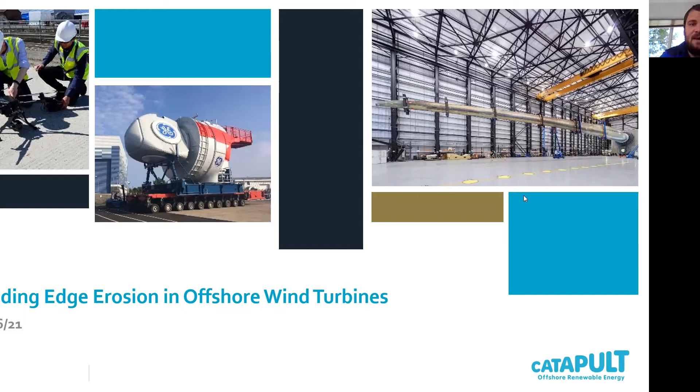It looks like the participant numbers are sort of leveling out a little bit. So, thanks, Vicky. Yeah.

So I think we're gonna start with an introduction from Dr. Steve Wyatt, our Research and Disruptive Innovation Director at the Offshore Renewable Energy Catapult. Thanks, everyone.

Good afternoon, everyone, and welcome to our workshop on leading edge erosion that we're holding jointly with the Royce Institute. I wanted to take a few moments to welcome you personally to this workshop. Thank you for giving up your time. But also, I want to set the scene a little bit, to talk a bit about the catapult and how we work, and also just set the scene for the workshop.

So the Offshore Renewable Energy Catapult has been around for around 8 years now. We're here to help the acceleration and growth of great UK technology into the offshore renewable space. We have the right expertise and world-class assets that are designed to help companies de-risk their technology and move it closer to market. We measure our success on 2 key drivers: our impact in terms of reducing the cost of offshore renewable energy, and also how we are creating UK economic growth in this sector that is growing tremendously at the moment.

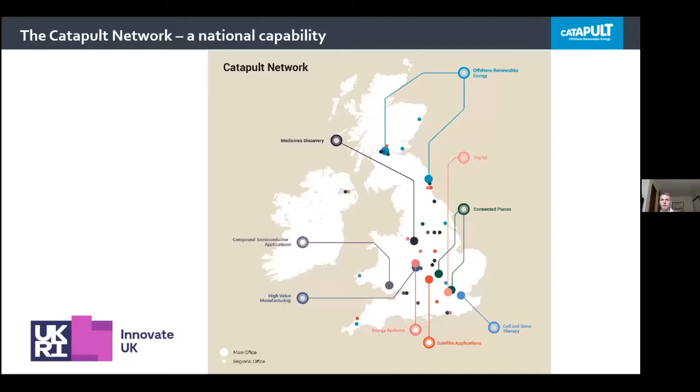And increasingly, we find ourselves worrying about the variability of offshore wind. So as we have more and more offshore wind deployed, we need to think about what we do when the wind doesn't blow. So increasingly, we're working in the area of energy storage technologies, often with the Energy Systems Catapult.

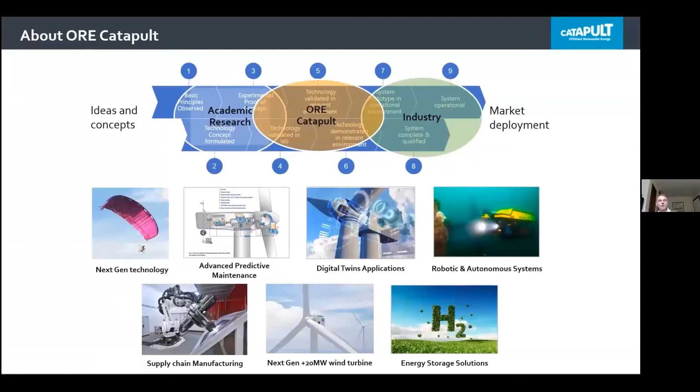And of course, we don't do this alone. We like to think we fill the gap between academia and industry. So we do a lot of the translation from academia into industry. And also we help industry by understanding their challenges and try and source specific solutions.

We have a number of key partners in academia. We've set up a network of research hubs in our key technology areas of rotor, powertrain, and electrical infrastructure, where we partner with the University of Bristol, the Universities of Sheffield and Warwick, and the universities of Strathclyde and Manchester. And these allow us to have really deep technical expertise that we wouldn't necessarily carry on our own payroll. We have the expertise there when we need to engage with it. That's not to say we don't work with other universities, but we find it useful to have these deep, enduring relationships.

I wanted to say a little bit about the market as well. I'm sure many of you are aware of the great success story that offshore wind has been.

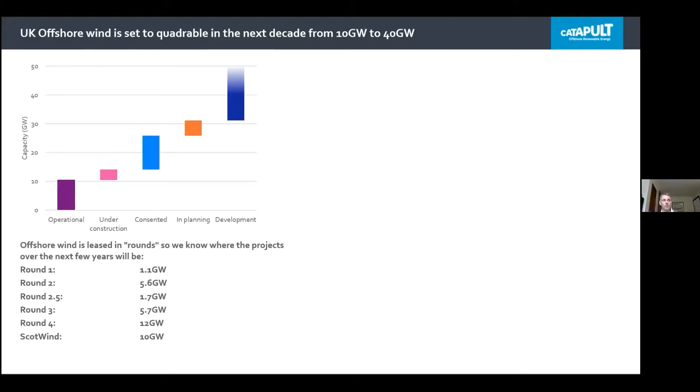We now find that we need longer transmission right out into the North Sea. Of course, that presents problems for maintenance. Of course, we do need even more reliable turbines to make it economic for them to operate that far offshore.

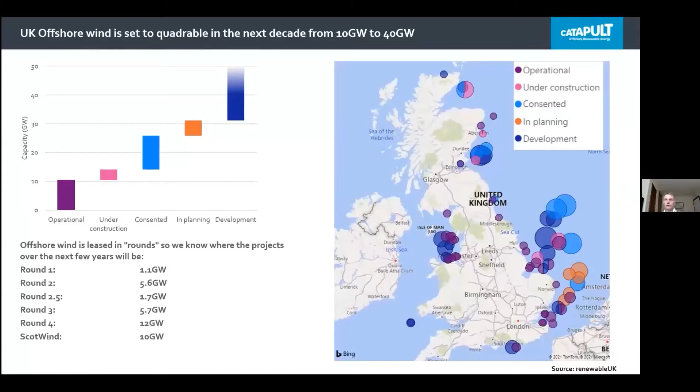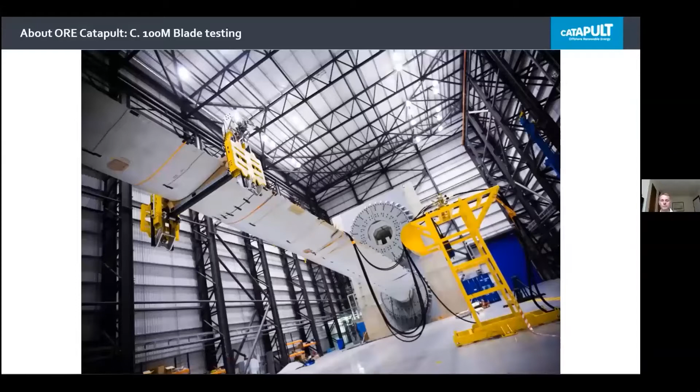We're already finding that people are coming to us with inquiries for blades that are longer than 100 meters, and indeed we're having to chop the tips off blades in order to get them into our facility. It shows you the rate of progress our industry is experiencing.

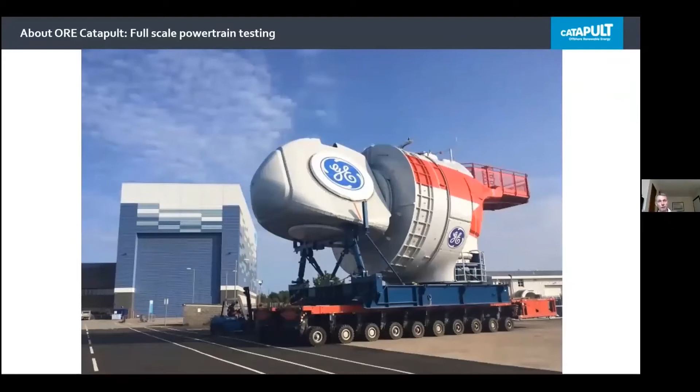And we're also very proud of our demonstration turbine that we have off the coast of Fife in Scotland. It's a 7 megawatt turbine that allows us to demonstrate and test technologies that we wouldn't ordinarily be able to get onto a commercial wind farm. But our turbine is of sufficient scale that it's truly representative of what is happening out there in the industry today. So, for example, we're able to trial different solutions for leading edge erosion and different aerodynamic add-ons onto our blades and evaluate that technology in a very representative environment.

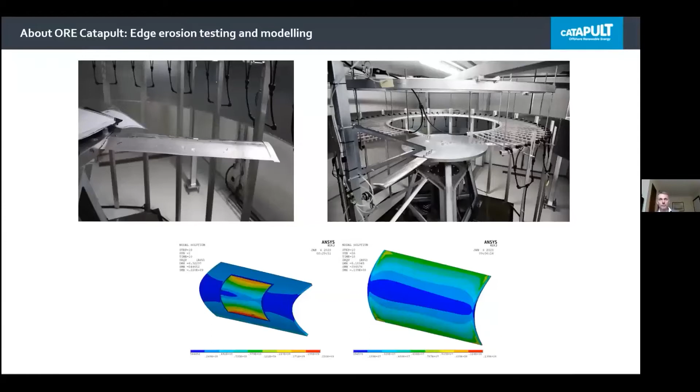And of course, leading edge erosion is a significant problem for our sector. With tip speeds in excess of 100 meters per second, so that's over 200 miles an hour, cutting through the air, cutting through the saline environment, and particularly impacting the water droplets, this is causing significant damage to the standard surfaces on wind turbine blades. So we need to find solutions. And it's great that we've gathered everyone here today to have this conversation and continue the search for great solutions for leading edge erosion.

The economic value in finding the solutions is significant. So we estimate that 1.3 million pounds of cost savings can be achieved per turbine if we can find solutions that mean that we're not having to stop operations and send O&M teams out to repair the damage caused by rain droplets. And of course, as wind turbines get bigger, tip velocities get even higher, and this problem becomes even more of a factor.

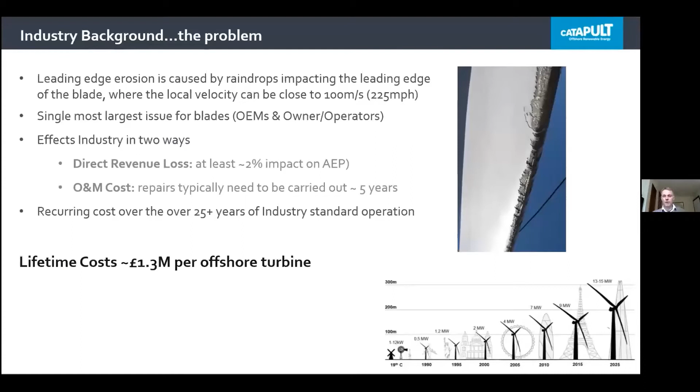So what are we going to do today? Well, it's great that we've managed to pull together key academic partners, key members of other research institutes and industry to have this conversation and try and think about what new material solutions are out there for leading edge erosion.

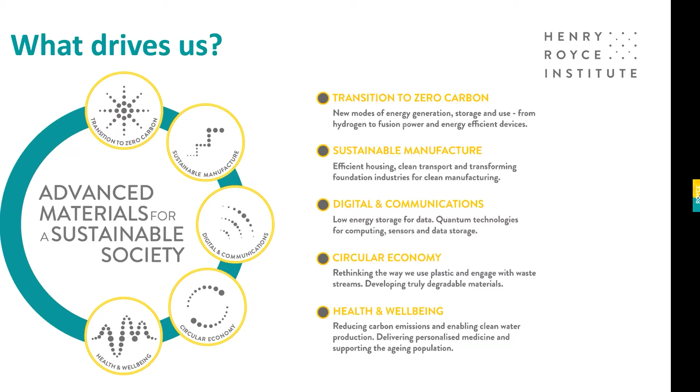Similarly, we're all aware that we've got an aging society. Healthcare is becoming more of an issue. We need to make sure we've got suitable materials available there. Similarly, around digital communications, circular economy, sustainable manufacturing, there are some really big issues that individual research organizations are unlikely to be able to solve on their own. We need to pull the material science community together to work on these challenges.

In terms of the work that we get involved in, it does span across every area of material science. So everything from the atomic scale, we do work with 2-dimensional materials, the graphenes, the quantum materials, so very, very small scale, right up to very large scale. So in some of our advanced metals processing, in some of our material systems for demanding environments, some very large scale materials challenges we're looking at there as well.

So a range of different materials underpinned by real expertise in imaging and characterization, so understanding the materials and the behaviors of those materials, and also a very strong digital theme as well in terms of modeling of materials and also digital approaches, digital-first approaches to material science development.

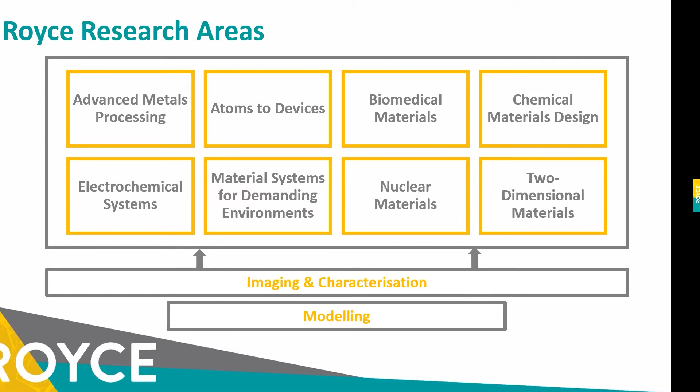As I mentioned, we're made up of a number of different institutions, but in terms of what the Royce adds to those institutions, the extra that we bring is really around these 4 mission pillars. The first is kind of what we're doing today, bringing together the material science community to focus on particular challenges. We also do work around understanding and documenting those challenges, producing roadmaps, producing position papers that can guide funding agencies and governments in terms of where the material science community needs particular investment.

I've already mentioned the facilities, and that's a big part of our day-to-day work as well, providing access to that state-of-the-art equipment that we've got spread across our various institutions. Another part of what we do, our third mission, is to support the translation of technologies out from the lab into industry. And again, I see what we're doing today as very much part of that.

We're conscious that often materials developments take a long time to move from the lab, get scaled up, get qualified for use in an end application. And we're looking at ways to accelerate that, to really help that movement there. And then the fourth part of our mission is an education and outreach agenda, recognizing that material science isn't an A-level subject here in the UK.

It's not necessarily an obvious subject to go into. A lot of us, certainly myself included, find ourselves material scientists after initially starting off a career in physics or chemistry or another science subject.

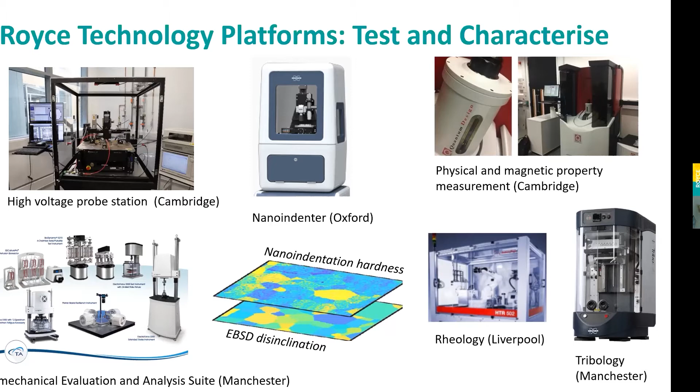So I'm Helen Ryder. I'm a Research and Facilities Manager for Royce at the University of Manchester, and my role is focused on imaging and characterisation. So imaging and characterisation is a cross-cutting platform that supports work across all the research areas. The multidisciplinary characterisation facility that I manage is all about connecting and integrating multiple imaging and characterisation techniques, particularly across X-ray computed tomography, electron microscopy, and surface science.

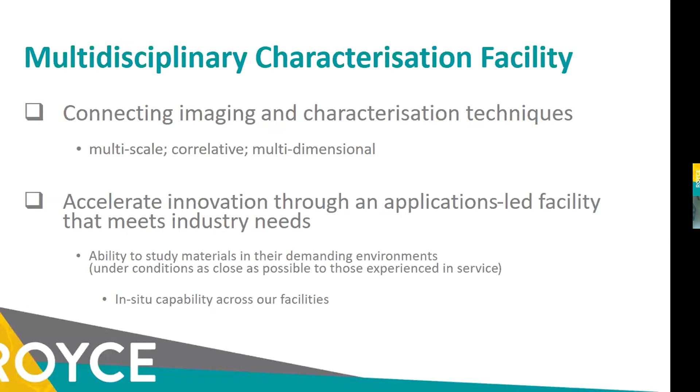So we offer new insights into advanced materials, and we can operate at different length scales, so we're not restricted by one technique. We also recognise the need to study the performance of materials in demanding environments, particularly important today, so as close as possible to what they would experience in service. For example, we've got numerous in situ rigs within our facilities. Materials can be subject to things like fatigue, compression, tension, flow, temperature, heating, cooling and biasing.

So just giving a little bit of an overview, an example about using multi-scale imaging and characterization across our X-ray computed tomography and electron microscopy. This is a steel that's used in nuclear pressure vessels. We want to understand its properties and how it fails, so we conducted mechanical tests to evaluate toughness and the failure mechanism of that material.

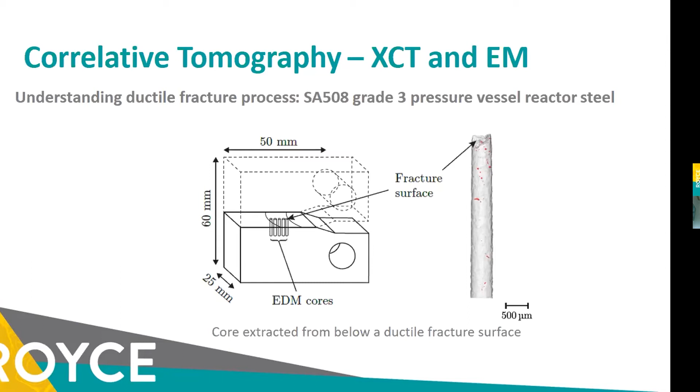To understand these mechanisms of failure, we've extracted some regions to analyse with XCT. This is a non-destructive technique which allows us to create 3D and 4D images, so if you test over time you can look at the changes. We can use these 3D images to find regions of interest, and for this particular example, these voids that form during failure, we can see with XCT. This provides us with really useful information.

But actually, we want to look further and zoom in and understand more about the microstructure around the voids, for example. So these voids are air holes, and the X-ray computed tomography shows the hole and the metal. When we go down in length scale with the plasma FIB that we've got, we're able to see these smaller voids because this is a much higher resolution technique, and so we can see that microstructure around the voids we were looking for. By understanding these voids and how they start to grow, we can better understand the failure of these critical materials, which is really important.

So that was just a very quick example of how we combine some of our techniques to generate more information about what we need in materials. Tim Burnett is in the audience today if you want to hear a little bit more about this work in correlative tomography that he does.

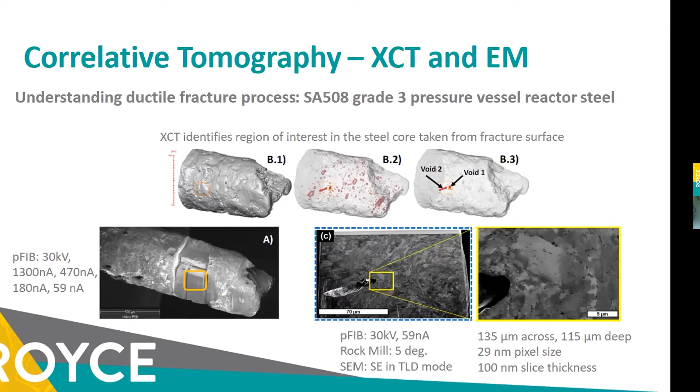So I also now want to move on and highlight a few of our imaging and characterization instruments that we have available. Just taking the opportunity to talk about the latest development in our X-ray computed tomography facility in Manchester. The NXCT is the UK's national research facility for lab-based computed X-ray tomography.

NXCT launched in November 2020, so very new. And whilst it was investing in new CT scanning capability, it's building on the existing capabilities and expertise of the partners, which include Manchester, Southampton, Warwick, UCL and Diamond Light Source. There's a real aim to deliver this unparalleled 3D imaging capability across the UK.

Our NXCT hub is based at the University of Manchester, and Royce hosts all of the XCT scanners at Manchester, where we have both cabinet-based systems and walk-in bays. We've got a range of testing rigs that allow us to do both ex situ and in situ testing.

Our systems cover a range of imaging resolutions, with voxel size from 50 nanometers up to 1 millimeter, for specimens ranging from 65 microns to 1 meter in length and diameter.

For example, we've got a large Rapiscan instrument, which is essentially like an airport scanner. It provides us the ability to scan large objects very fast, but the resolution is obviously very coarse with that.

At 1 millimeter. And then we've got our Ultra system, which is the highest resolution lab-based XCT system, at 50 nanometers, but only for very fine samples with that.

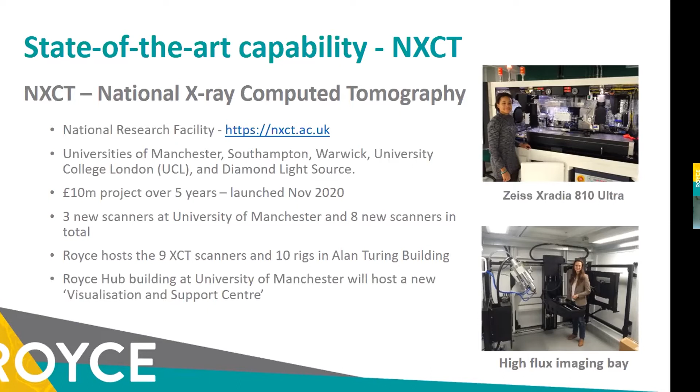Looking now at our electron microscopy equipment, we've got a huge range of EM capability across the different partners in Royce.

With SEMs, TEMs, including the STEM, these have got EBSD, EDS, EELS, as well as in situ capability, including environmental cell holders for heating and biasing, and in situ SEM nanoindentation as well.

We have a Hysitron Pico indenter, which allows us to perform quantitative nanomechanical testing while also simultaneously imaging in the SEM. Coupling these two techniques allows the researcher to probe with extreme accuracy and then image that deformation throughout the test, which is really good.

Another example of in situ capability that we have in our EM centre is the TANIST. This is a scanning electron microscope that really pushes those boundaries of in situ testing, particularly in strain and temperature.

We work very closely with our equipment suppliers, Tescan and NewTec, to co-develop the first fully automated in situ testing system that can conduct thermal and mechanical testing, as well as simultaneously undertaking the microstructural observations that you would usually expect.

The automation we're expecting with this instrument will allow experiments to run continuously. Measurements can take place between smaller loads and temperature steps than were previously possible, and over a much larger range than what's possible manually. So it's very much a developmental bit of kit.

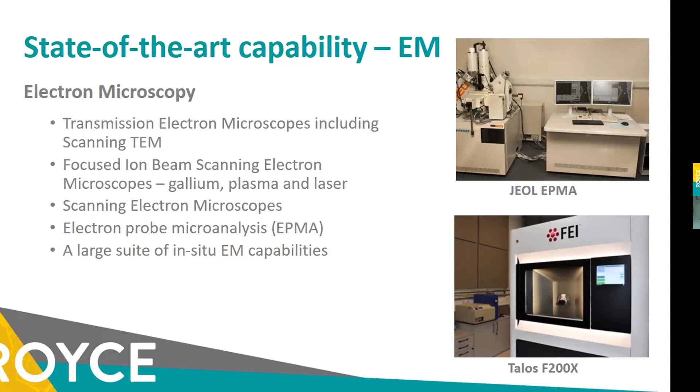As we move on and look at what's available across our surface science area, we have a vast range of equipment, including our mass spectroscopy imaging techniques for 3D imaging and depth profiling, with high elemental sensitivity and high spatial resolution. So for things like the NanoSIMS, time of flight TOF-SIMS, and atom probe tomography.

I think Paula Robbins is in the audience today, if you want to hear a little bit more about the atom probe, which sits at Oxford.

From our range of XPS capability, I just wanted to highlight the HAXPES instrument, which is actually the world's first high throughput HAXPES lab instrument, installed in 2019. By using X-rays with more than six times the energy of traditional XPS, the information depth has increased from several nanometers to a few tens of nanometers.

The HAXPES can probe those deeply buried layers with minimal destructive depth profiling into the bulk, and it can be applied to characterize a wide range of thin film materials, with applications ranging from electronics to sensors, where layer thickness and interfacial properties are really crucial. The method has also been shown to have sub-monolayer sensitivity even for deeply buried layers.

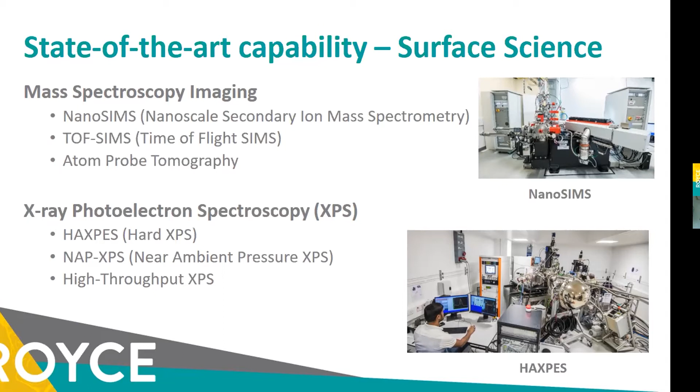That's really exciting. Some of our other techniques and capabilities include AFM, XRD, and Raman, and I just wanted to highlight our nanomechanical testing facility. This features state-of-the-art nanoindentation instrumentation, designed to investigate the mechanical properties of bulk materials, coatings, polymers, even biological tissues. The facility has a huge range of instruments allowing for testing of these materials.

Soft materials, from tens of pascals to hundreds of gigapascals, so you range from collagen gels through to zirconium carbide coatings. Materials can also be tested in different conditions - ambient, at liquid, at set humidity, different temperatures ranging from -100 to 800 degrees C.

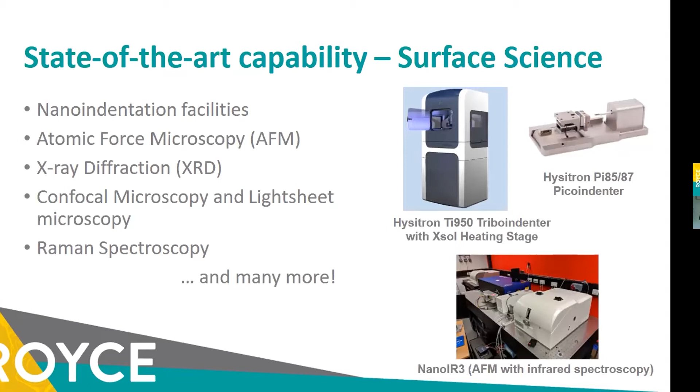Hopefully that's given a little bit of a flavour for some of the capability that we have across Royce, particularly highlighting some of the techniques that we have available in Manchester, where I'm based.

Just to let you know about accessing - our equipment is open to all researchers for access, and we have an online database as well to find out more about what's available. So you can access that. Our info at Royce email will go to our central support team, and they will help direct inquiries to the relevant Royce partners as necessary. So it doesn't just go into a black hole, it goes to somebody who helps facilitate that.

They link up with our business engagement teams, our research and facility managers like myself, who take those inquiries forward with our extensive technical teams and academic networks, who can help facilitate access to support, testing on the kit, and also supporting the designing of experiments as well, which I think is really good. So thank you very much.

Helen, thanks for that. That's brilliant. I wish all that was available during my PhD - it would have made my life a lot easier.

Right, so moving on, I would like to introduce Dr. Mark Forrest, who's going to kick off on the challenge that we're looking at around the problems and impacts of leading edge erosion.

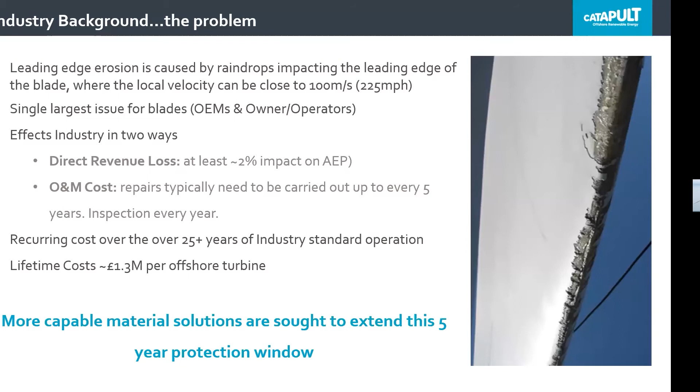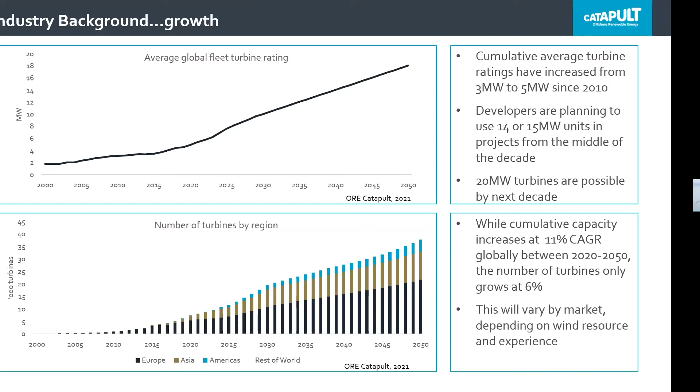In terms of the current solutions, you can imagine these are often remote assets operating offshore in remote, very difficult to service areas at sea, and it requires a 2 to 3 person team per turbine to actually make it right, and they typically take anywhere from a few days to up to a week. The other complication of being offshore is that access to the assets really goes in seasons and depends on the sea condition to even get access to the site.

And so before even the direct costs of repairing these blades are incurred, just getting out there in terms of hire of vessels that may be required to get to the turbines is a very large cost indeed. Now typically, as I've mentioned before, the warranty periods offered by OEMs are typically around 5 years.

And that has spurred a large third-party market for leading-edge protection add-on kits, whether it's tapes or molded solutions, to give this extra life, because there's a fine balance between OEMs and operators of the farms, and there are mixed motivations there. On the OEM side, they'd like to reduce their CapEx and not necessarily put an ultimate solution into blade leading edge erosion issues, because they want to keep costs down. But equally on the OpEx side, they're potentially losing a lot of money from materials and blades that won't necessarily perform as we would like them to. So obviously there's a large market opportunity here for longer lived LEP solutions.

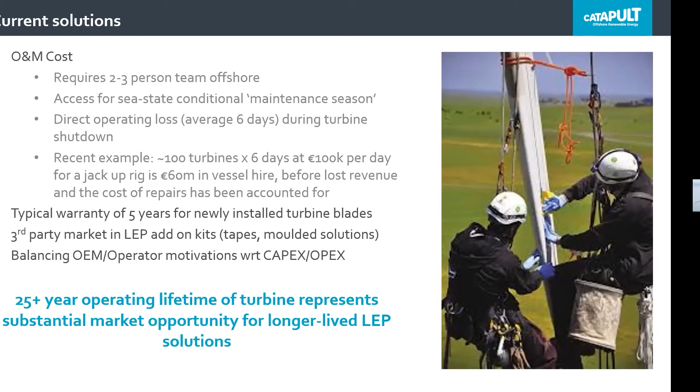So in terms of the near-term drivers, the one factor which drives development in this sector is what's called the levelized cost of energy. It's a metric we use to see that the total cost, which includes both the CapEx and OpEx, is as minimal as possible. And we've seen the rise of wind energy as one of the world's cheapest forms of power, and the way to access that is basically by increasing the swept area of the turbines.

And the other driver, apart from the physical driver, is what's called the balance of system costs. So all those other physical assets, like sea substructures and cabling, are very large costs to produce a farm at sea. So there's an economic driver there to have fewer turbines deployed, because the balance of system costs will decrease as a result. It's always far more economic to produce a few large turbines than a whole field of smaller turbines. So they're the 2 main drivers to try to reduce the levelized cost of energy.

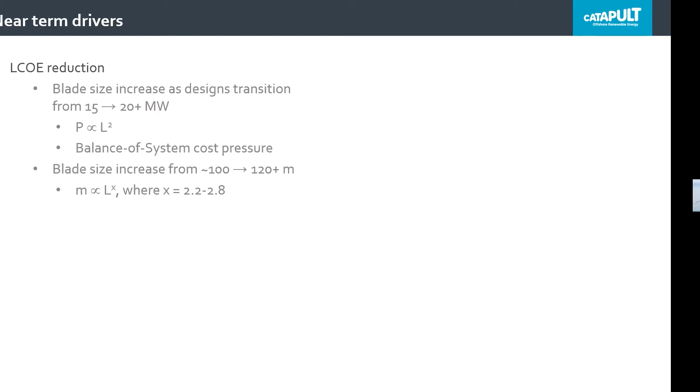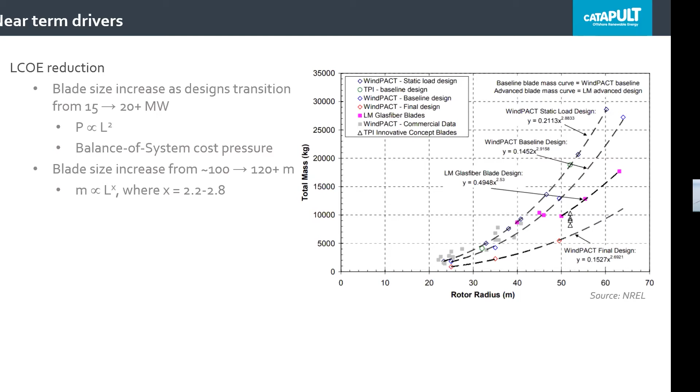And this is where the trick is, that while the power produced is quite favorable in terms of length of a blade, the scaling of the mass of the blade as to the length isn't quite so charitable. So according to the efficiency of the blade in terms of its mass, you can see on the right-hand side that different blades are more mass efficient than others, and so that exponent of that length value, the final mass can be from 2.2 up to 2.8. And why is this so important?

Basically it's to mitigate torque. So as the mass increases, the torque experienced by a turbine increases, and that goes with cost. So as those torque loads that we have to react out increase, the cost of a turbine increases, because drivetrain loads have to be met, as do tower loads, and a full consequence of cost occurs with greater mass. So it's a great driver.

Now the trick is, and I think we can all appreciate this, obviously there's the first case, we want to reduce mass regardless for efficiency, but also by reducing torque, we can get to the same equation in terms of power by increasing the speed of a turbine. So we don't have to have as large a torque experienced. So to get to this efficiency, apart from the mass reduction, the other way to do it is basically operate the turbine at a higher angular velocity.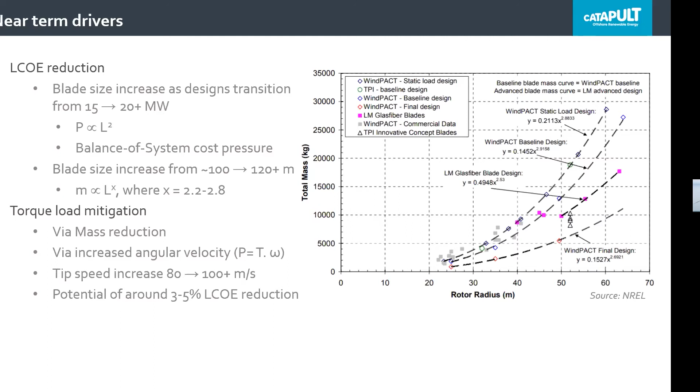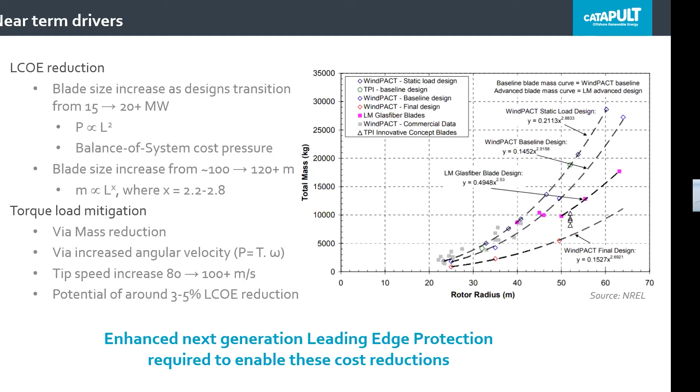And obviously, as we go to higher and higher velocities, the problem of leading edge erosion mounts. But we have seen that it's projected around 3 to 5%, which is not insubstantial, reductions in the levelized cost of energy will result if we can go from a regime of 80 meters per second up to around 100 meters per second. But obviously that requires a step change in terms of the technology of the materials, but it's really an enabling approach to get to this next level of cost reductions and turbine sizes.

So at the ORE Catapult, as Steve touched upon, we have a facility, a rain erosion test rig, which uses what is the default wind industry standard rig produced by R&D AS. We use it as a commercial and research facility. So basically the idea is to get more realistic wind turbine operation and modeling of materials.

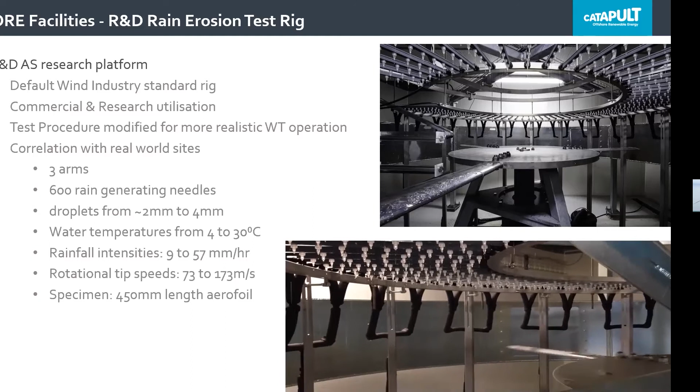So as you can see there, it consists of 3 arms, on which a representative sample of a leading edge is placed, and that's rotated at variable speeds through this array of needles, which can simulate different offshore rain conditions. And that's used along with other tools to investigate materials, both from the science perspective as well as development of new solutions.

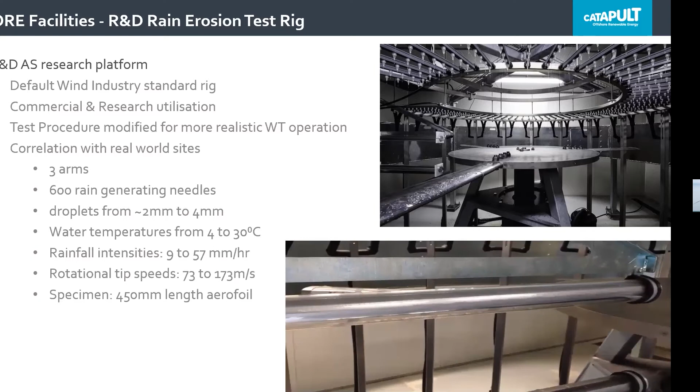So as a research focus, this ties into our research in terms of producing maintenance-free blades, and that's one of 3 areas. We're looking at blade remote inspection solutions, for instance, to inspect and repair leading edge surfaces. The second obviously is blade health monitoring solutions, so we can see at what point in the life cycle of a blade those repair actions need to take place. And finally, lifetime enhancement, where we are looking at better solutions for leading edge erosion.

And with that, I'd like to hand over to Kirsten, who'll go a bit more in depth into the science, and she'll also offer a call to action and talk about a process by which we can have materials looked at in future. Thank you, Kirsten.

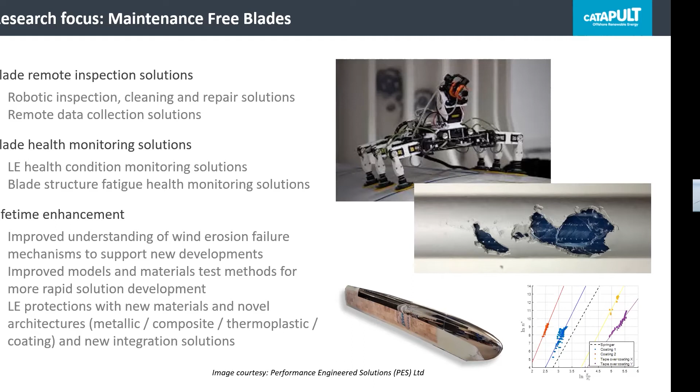Thanks, Mark. Hi, everybody. So as Mark said, I'm the leading edge erosion expert for the ORE Catapult, working in the blades team. I'm sorry. And just a little bit of background about me: I actually started off in the aerospace industry a long time ago, where I first came across leading edge erosion. And I've been working in the topic for at least 15 years. And I'd like to say that I'm still learning as I go along.

So what I'm hoping to present to you in this section is the current published state of the art as I know it in terms of leading edge science, but also some of the recent investigations and work that have come out from the Catapult. What I'll be presenting hopefully will be used to spark your thoughts on your own technologies and what you're working on. And at some points I will note where the information that I'm giving is going to be of real importance in terms of the evaluation that I'll describe later on. So, just turning around.

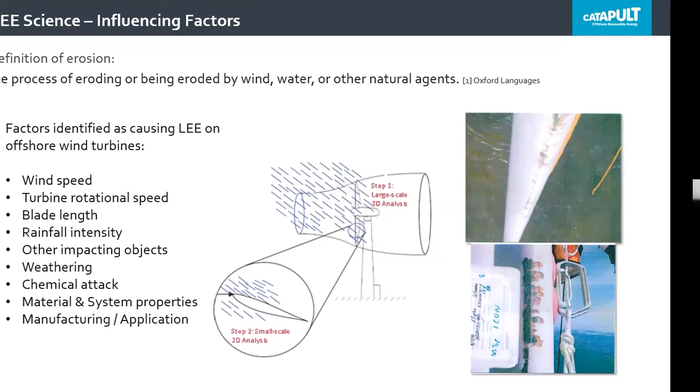What you can see in the middle is some CFD analysis. Max already explained some of this, which is about showing how the wind is driving the rain into the flow of the turbine and how that resolves in terms of the actual 2D scale on the blades. So I won't go into too much detail, because Max explained it, but what I would like to show you is actually the outputs of some of the research, which is quite interesting.

So on the left, if you've got a wind speed of 5 meters per second, your blade angle's at 90 degrees and your droplet size is 2 millimeters, what you can see is an increased intensity, shown in a slight greening on the leading edge of the turbine. But under the same conditions of a wind speed of 5 meters per second, same blade angle, but a droplet size of 5 millimeters, which you'd expect to be more damaging, you actually see that the 5 millimeter droplet doesn't impact the leading edge at all because of the airflow.

And actually the most critical of those that we modeled is if you've got a 25 meters per second wind speed and a blade angle of 270 degrees and a droplet size of 5 millimeters, that causes the most extreme damaging case in terms of impact energy.

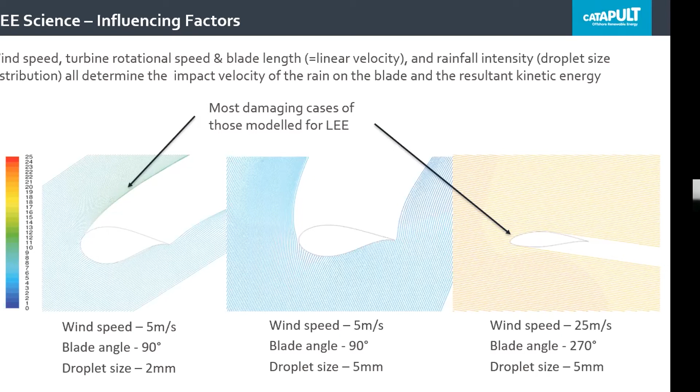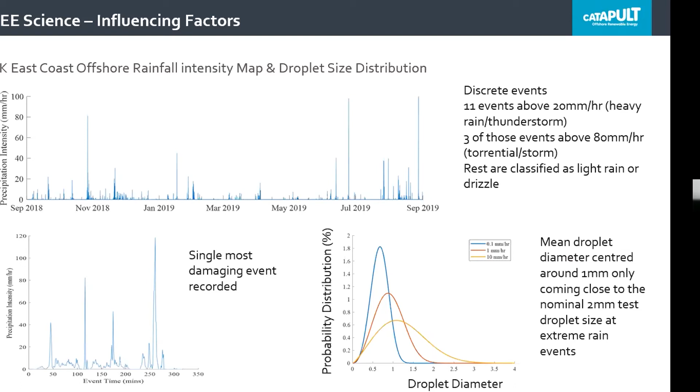The other thing to point out is that your droplet sizes change dependent on your rainfall intensity. So if you see on the bottom right, this is a probability distribution measured from our offshore data. The mean droplet diameter is actually around 1 millimeter and not the 2 millimeter size that's been used in test. And only if you got to the extreme events would you come close to that 2 millimeter droplet size. So the way we're testing is not actually representative of what's happening offshore. And so this is an active area of research.

So other impacting objects that are often talked about, particularly hail. A lot of people have seen pictures of aircraft with large hail damage.

One of our employees, while he was at Strathclyde, Hamish MacDonald, did an investigation into hail, basically taking the onshore data from UK MIDAS stations from 1949 to 2013. And what you can see is the onshore, what was recorded is the majority is ice pellets or small hail, followed by larger hail sizes.

He then converted the number of events onto a wind turbine to calculate the average annual energy. And what you can see is that the most frequent ice pellets or small hail actually has the lowest annual average energy. And it's not until you get to the slightly larger hail sizes that you're increasing in intensity, but this is still well below the intensity that is actually occurring from your rain impacts.

And actually extracting from our ORE NOAH offshore data, we've never actually recorded any hail, and we've only recorded 6 minutes of ice pellets in 7 years with an average diameter of 1.36 millimeters.

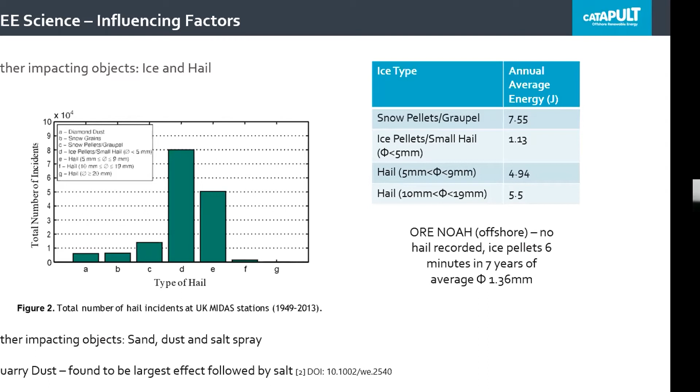Other impacting objects that are talked about, considered important, but maybe haven't been investigated, are sand, dust, and salt spray. Sand generally is dealt with by testing to the ASTM G76 sand erosion test method. But there was a study conducted in Ireland with Suzlon, which showed that onshore, if a wind farm is located near a quarry, then actually that had the highest significant effect of erosion on turbines, which was then followed by salt on nearshore turbines.

Weathering, I think, is one of the key critical material parameters that would be taken into consideration in terms of evaluation of new solutions. So currently, what you can see on the left is the UVA intensity measured onshore and offshore, and these two sites are about 8 miles apart. So one's 3 kilometers offshore and the other one is just onshore.

And you can see that actually the UVA intensity is 2 to 3 times as high offshore. So although we're talking about degradation through rain impacts, there's obviously going to be degradation through UVA and UVB weathering that also needs to be taken into account in future solutions.

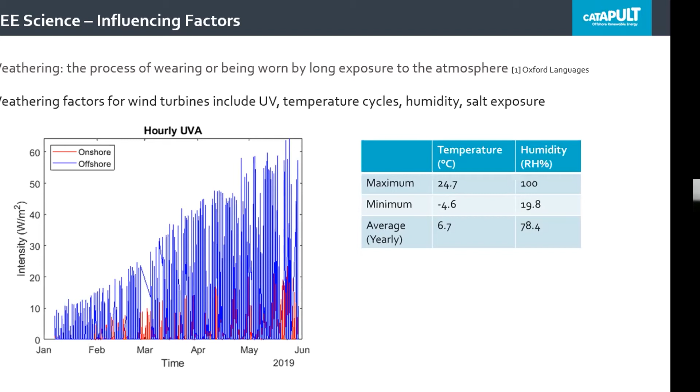Just to note in terms of temperatures and humidities offshore, the maximum measured temperature that we've recorded is 24.7 degrees C, and the maximum humidity is 100%. The minimum temperature is minus 4.6, with a minimum humidity of 19.8, and the average yearly value shows that it's quite cold offshore, with a high humidity environment in general.

So in terms of UV degradation, weathering has been really well understood by individual coatings manufacturers for decades and individual materials, but the correlation and combination of weathering with rain erosion is still a really low TRL level process. In the research that we have done so far, we've looked at changing color and gloss under both natural weathering and under 2 accelerated weathering test methods, QUV and xenon arc, as you can see on the left for delta E, that's the change in color.

Again, changing color and gloss is really important in terms of material solutions, as they quite often can be the prevention for a solution being installed on an onshore wind turbine. Offshore, color and gloss isn't under any regulation, but onshore, local authorities set the color and gloss requirements, and if you don't meet them, your LEP won't be able to be installed.

So here we're just showing that xenon arc actually follows the natural weathering quite closely. Ignore the 3 measurements at the top because those are actually from a leaf falling on the surface of the sample. QUV is quite damaging, but the actual requirement after 3,000 hours is a delta E change of 1, and it's just very difficult for a lot of materials to actually meet.

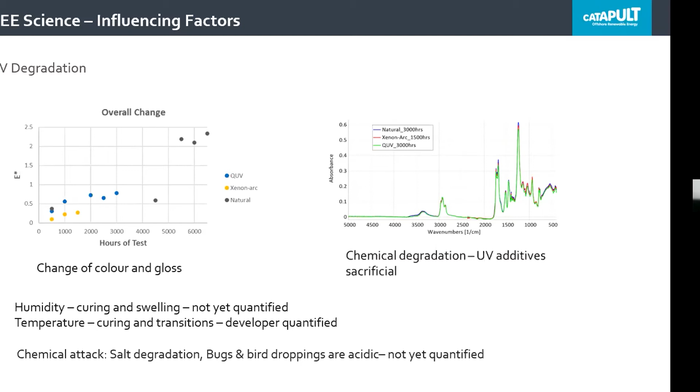So moving on to material and system properties, this is my favorite image for rain erosion, and it's the one I turn around and say is key in terms of the evaluation.

George Springer, who works in the US, developed a model based on over 20 years of aerospace community research into rain erosion. Springer's model says that when a droplet impacts the surface of the coating system, what's really critical when thinking about your solution is that in rain erosion you're always talking about a system, not just a single LEP. This is because as the droplet impacts, it sends a shock wave through the LEP and then onto whatever is below it.

So in this case, I'm showing a classic rain erosion system, which is a coating followed by a filler or a glass epoxy. The filler could also be a gel coat. There could be a tape on top of the coating, or in new systems, you could actually have a hard thermoplastic or metallic material bonded onto the glass epoxy.

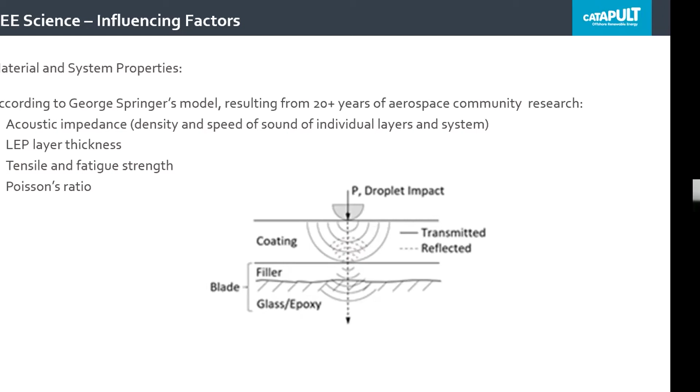So what George Springer said is that the key important material properties are the acoustic impedance, the layer thickness of the LEP, the tensile and fatigue strength of your LEP, and the Poisson's ratio. These properties are used to develop a model which the wind industry uses to predict the performance correlation between rain erosion test rigs and wind turbines. And although it's not well validated in terms of that correlation, a lot of people have found that the theory behind this model works for their materials.

Moving on to more laboratory-based testing, the University of Limerick, through Anthony O'Carroll's master's thesis, did a fantastic study correlating different thermoplastic materials to rain erosion resistance in their rain erosion test rig. What you can see from left to right is increasing rain erosion performance. First is incubation time, the time to first see some erosion damage, whereas total duration is usually the time before you actually see the composite material. He found that polyethylene and polypropylene have much better rain erosion resistance.

They then compared this to nano indentation measurements. So what you would think would be important, like your storage modulus, your loss modulus, your tan delta, the relationship was actually found to be inconclusive. They did find some relationship with hardness, which has also been noted by coatings manufacturers—there seems to be some relationship with hardness, where in this case lower is better.

But in particular, they found that the short-term recovery—which for those who don't know, in nano indentation, is basically the initial depth of the indentation minus the almost instantaneous recovered depth from the unloading curve, I'll come into that more later—they found that the higher the short-term recovery, the better.

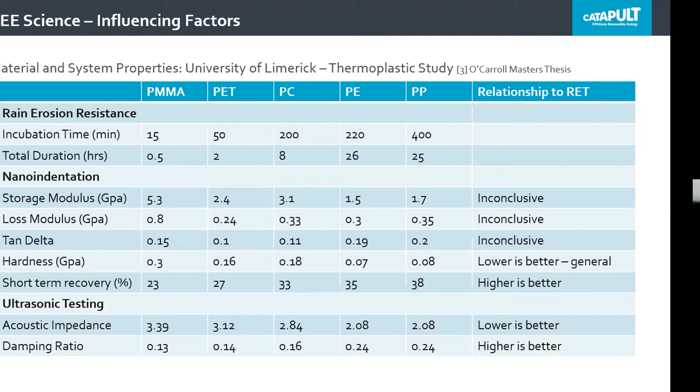For ultrasonic testing, they measured the acoustic impedance and the damping ratio, and found that for thermoplastic materials, it's better to have a lower acoustic impedance, meaning sound waves travel through the material, and higher damping dampens these sound waves out.

They also measured mechanical properties using normal tensile tests, so modulus, ductility, tensile strength, yield strength, and toughness, and generally found that a lower elastic modulus and lower tensile strength is actually better for rain erosion resistance than higher stiffness or higher hardness. Better ductility or elasticity is also good.

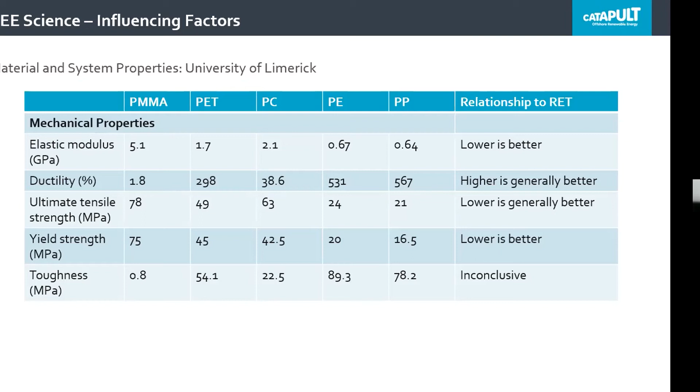ORE Catapult have also done a similar study on metallics. This hasn't been published yet, where we've looked at extruded aluminium, titanium 64, and electroformed nickel cobalt. These are all materials used in the aerospace industry, and their rain erosion resistance goes from aluminium at the lowest through titanium to nickel cobalt at the highest.

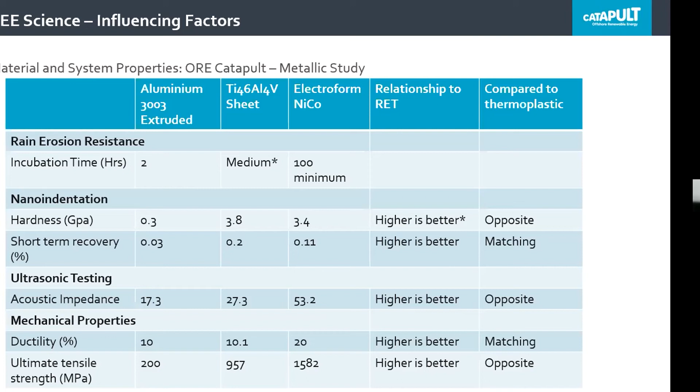If we look at nano indentation, we see the opposite - for hardness, higher is better. Short-term recovery actually matches that with the thermoplastic materials. Interestingly, the acoustic impedance in metallics is better when high, which is opposite to thermoplastics, and for mechanical properties, better ductility and actually higher tensile strength, which is also opposite. So what I'm trying to show and conclude is there's still a whole load of unknowns and a lack of relationship between material properties and rain erosion resistance.

Going back to short-term recovery, what you can see is we've used nano indentation and found some correlation with short-term recovery and with what we actually observe in the rain erosion test rigs.

In this first case, we looked at rotational speed, using two different rates of nano indentation - 50 nanometers per second, and 250 nanometers per second on the right. If you observe the length of the arrow as the size of the effect, the short-term recovery at the higher droplet or higher indentation speed actually reduces the amount of elastic deformation.

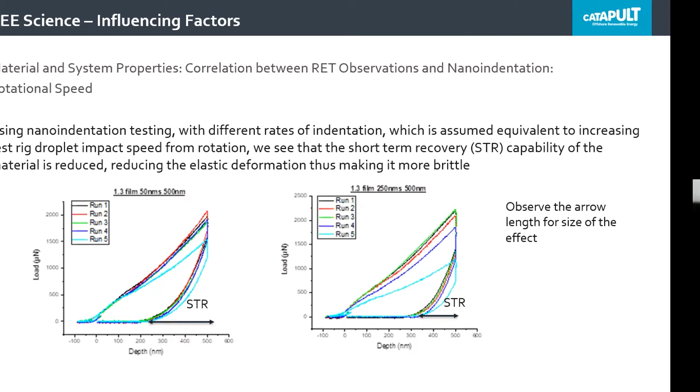Same again if we look at droplet size. In this case, we looked at using different depths of nano indentation, which we assume to be equivalent to changing the droplet size. You can also see that short-term recovery, as you get to a larger droplet size, shows a lower short-term recovery value.

We've confirmed these very recently against rain erosion tests in a DOE, and it shows that rotational speed has the highest significance for erosion, and the second next order is the droplet size. So therefore we feel that nano indentation, if you can measure it on your material, could be a good indicator test, perhaps, of its erosion performance before it goes into the rain erosion test rig.

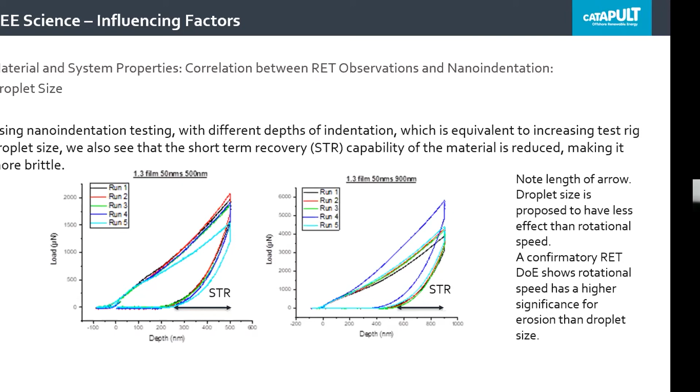Now moving on to the next section, which talks about what are the current solutions and what are the future requirements. I'm going to thank Suzlon very much here - this slide was presented by Suzlon at the DTU International Symposium on Leading Edge Erosion in February this year, and shows a really good overview of what the current LEP products are on the market.

So we can see the 3M products - 3M have a coating system, but they're best known for their tapes, which they first started developing for aerospace and have been known for aerospace for a long time. The current product is the W8750, but they've just introduced the new product, the 2.1. Aerox is a hybrid polyurethane urea coating system. The BASF AkzoNobel is a polyurethane coating system, as are the Mankiewicz systems, as is Hempel, as is Belzona.

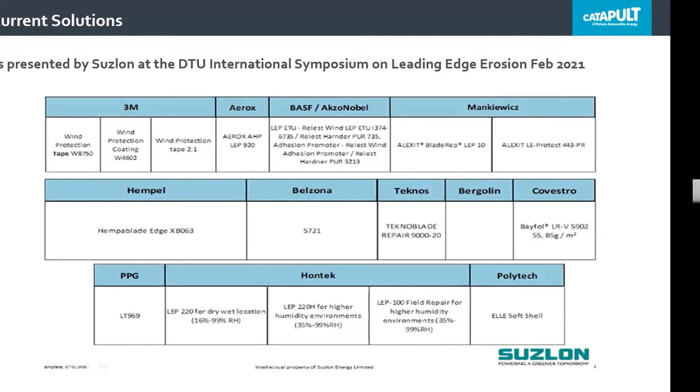Teknos is a polyurea coating system. The Covestro is a thermoplastic soft shield - we don't know the material. PPG is a coating, and Hontek have a range of coating systems and soft shells. Finally, Polytech is the current market leader in terms of rain erosion performance, which is a thermoplastic soft shell.

They also presented an overview of the rain erosion test results. What you can see is at the lowest, some of these products in rain erosion tests are really performing around 4-5 hours, which is exceedingly low. I would say current coating systems are around 20 to 30 hours, of those on the market, and ones that are in development are getting higher than that.

Your tape materials can perform really well in the rain erosion test, and I'll show you in a couple of slides, perform really badly on a wind turbine.

But the leading product, as I said, is the Polytech Elle, which is LEP M. Here they show it as lasting 100 hours before failure. ORE Catapult have just finished testing, probably at a lower rotational speed, and it lasted 160 hours.

Interestingly, Suzlon's comments at the bottom ask, are they basing their decisions only on how long the coating performs in the rain erosion test rig? And they're turning around and saying not. So they're not just looking for products that have really high performance in the rain erosion test rig, they're also looking at how this is applied onto a wind turbine, both in production and in repair.

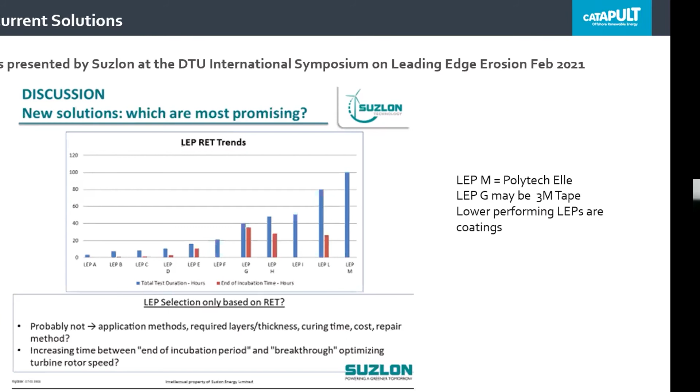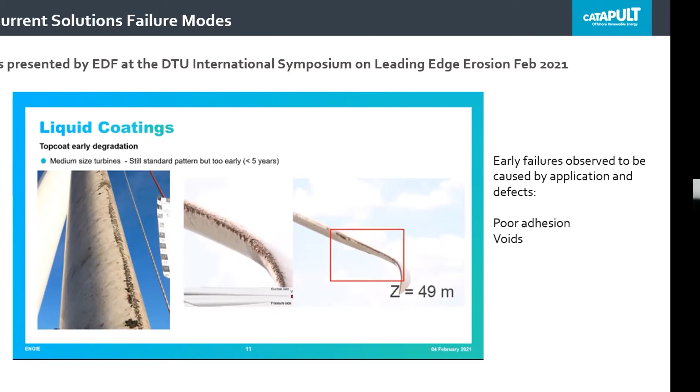I guess the current information, which is quite sketchy, is some of the new products that I showed you on the first slide are lasting less than 5 years. And they're generally observing early failures caused by the application process or by defects. A lot of them are failing by poor adhesion or by voids.

The tapes, as you can see on the left, tape 1.0 was the original aerospace tape, which actually had really good performance. So it lasted about 5 years of operation offshore. That's actually probably the best recorded performance so far of any solution.

The Polytech L is as yet unknown. The 2.0 tape that they replaced it with, the W8750, has actually suffered really early failures. So only after 2 years, and you can see that when it's failing, it has a really high effect on the aerodynamics. And this is something else to consider in terms of solution.

As one OEM put it, if you've got a great rain erosion solution, which turns around and has more of an effect on my AEP power performance than the erosion does, I won't fit it to the turbine.

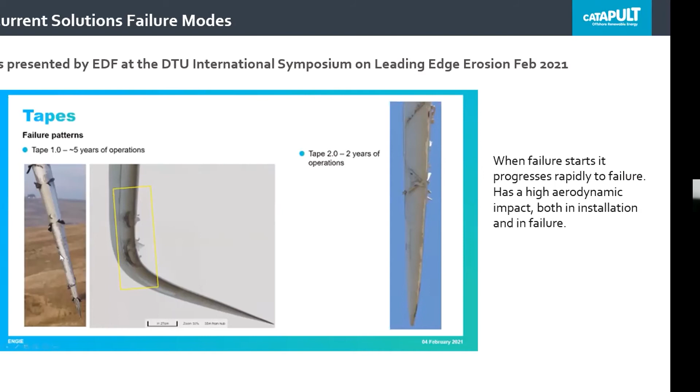The last one that I'm going to show you is the Polytech L. As I said, it's the best performing on the market. It's probably been, here they're showing a trial of 1 year, but we know of other trials where it's been on for 3 or 4 years. So far, it's not showing any signs of erosion. What they think is they'll probably get failure through the sealing of the shell on the edges.

When we put this material into the rain erosion test rig, you can see that it actually does start to erode quite quickly in the test by tearing, which increases gradually. And you can see after 80 hours, the product showing significant damage. We assume that at that point, or much before that point, the product would have been removed and a new shield applied.

Just to say that 10 hours is predicted by the Springer model to actually be 17 years on a wind turbine, to give some relationship.

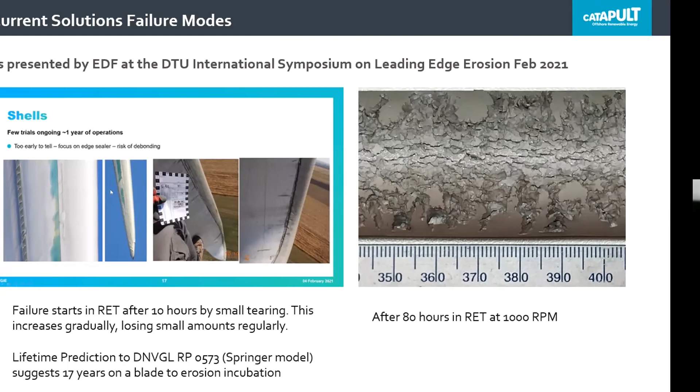So what do we want from our future solutions? The ultimate goal is to develop a solution that lasts the whole wind turbine design lifetime, 25 to 35 years, is completely maintenance free, doesn't affect the aerodynamics either on installation or as part of the erosion process, and is capable of all of this at tip speeds of 100 to 120 meters per second.

Sorry, mistake. The concessions that we know the OEMs will allow on for this kind of solution against the traditional qualification requirements are removal of noise requirements for offshore only, removal of the color and gloss requirements for offshore only. The business case basically allows a high material cost solution, which they won't allow on onshore wind turbines or generic onshore wind turbines anyway.

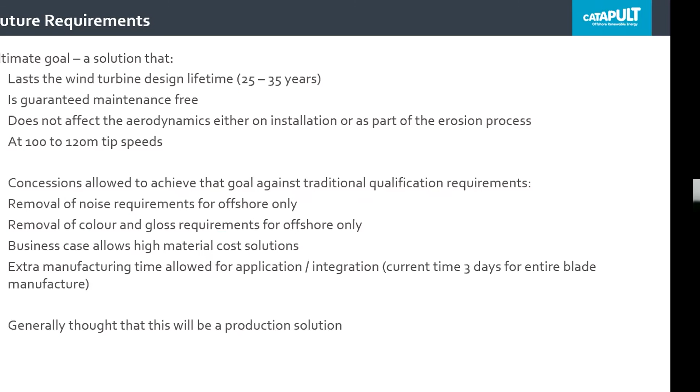They'll also allow extra manufacturing time for application or integration. Generally, it's thought that these solutions, when developed, would be a production solution. The alternative goals are solutions that are either very easy and cheap to replace regularly during planned inspection periods, or between inspection periods while minimizing turbine stoppage time. Here I said possibly drone or robot solutions.

Solutions that extend just beyond the current product's rain erosion performance for current tip speeds. Solutions which enable high tip speeds for short periods, which are replaceable. Solutions that have better rain erosion performance or guaranteed improvement in application characteristics, and the operators are looking for those. Also one suggestion, and there might be other smart solutions - one would be that it self-monitors, or any other smart solutions that turn around and have good rain erosion performance, but also do other things.

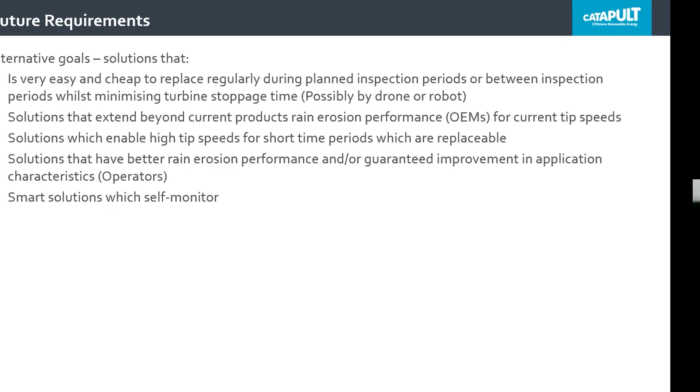So just coming on to the last section, which is the application process. After this seminar, I believe an application form will be sent out to all of you, and we're asking for this to be completed by the 23rd of July.

Describe the proposed approach for application of the material solution on the wind turbine, both during production and in situ repair, and if it's only one, just include the one. Describe the current development status of the material solution. Describe what further development needs to be required before it could be applied.

Finally, what we're looking for is information about the main risks associated with the material solution, its application procedure and development process - so what's going to stop it coming to market, but also include things like health and safety, because the wind industry, being green, has serious considerations in terms of health and safety for the materials they use on the blades.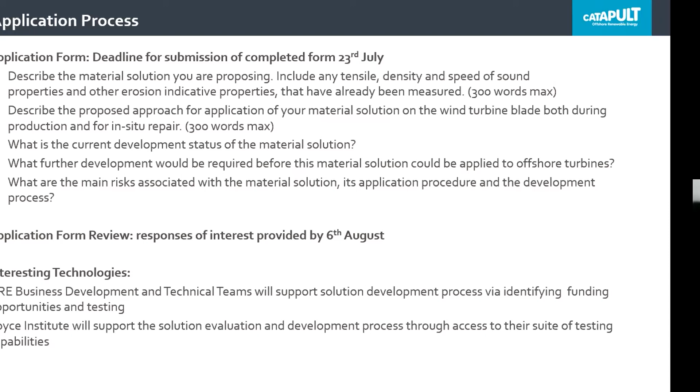Excellent, thanks Kirsten and Mark. That's been a fantastic overview of the challenge and the opportunity. There's a few questions that have come through in the chat, and I think primarily these will be - sorry, I have the fun of childcare today - primarily aimed at Kirsten and Mark. I don't know if you've had a chance to look, but the first one I think is most relevant to today's call is around the test procedures for the erosion tests and the test standards. Kirsten, I don't know if you'd be able to answer that one.

Basically, the rain erosion test overarching test specification is ASTM G73. There's also an ISO standard equivalent, which I believe is TS 19392-2. But the ASTM G73 was developed for the aerospace industry and is very generic, so it actually allows all types of rain erosion test equipment and rain erosion test designs. So all of the OEMs from the wind industry got together and developed a guideline called DNV-GL RP0171, which describes the actual test procedure they expect the rain erosion tests to be performed by.